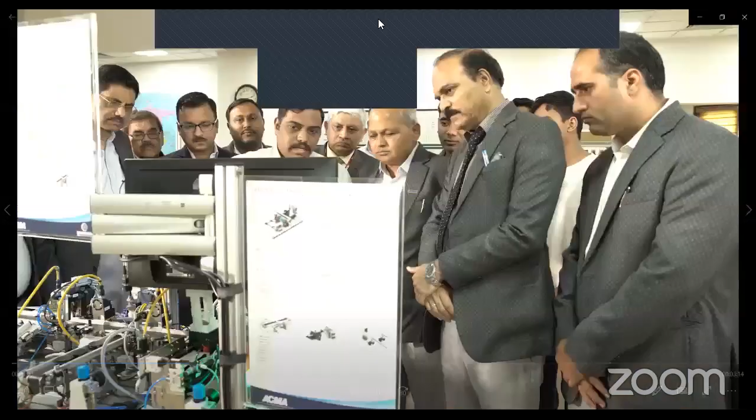To augment the capabilities of the Indian auto component sector in line with changing customer needs and global technological developments, the ACMA Center of Excellence, Saksham, has been conceived to upskill and create talent for the industry. The Center of Excellence focuses on a four-pronged mission: providing a conducive learning environment for enriched experiential learning, supporting the auto component industry for quality first and safety must, facilitating an organizational culture that places organizational goals above individual ones, and enabling design in India for new product design and development.

In order to provide soft skills and technical skills to the industry, we have created this Center for Excellence along with the partnership of our industry academia such as IIT, AOTS and Maruti Center for Excellence.

Setting up of a Center of Excellence has been on ACMA's agenda for the last several years, and I'm glad that this year our dream took a concrete shape. We now have an ACMA Center of Excellence, Saksham, set up in Sonipat. Saksham, as you all know, means empowered, enabled.

The Center for Excellence will lean on subject matter experts and industry experts, and look at bridging the gap that exists between existing capabilities in our industry and what the automotive industry will require as we make leaps in terms of technology, implementing new technologies, new processes, aiming for zero defect quality, and digitizing the entire supply chain.

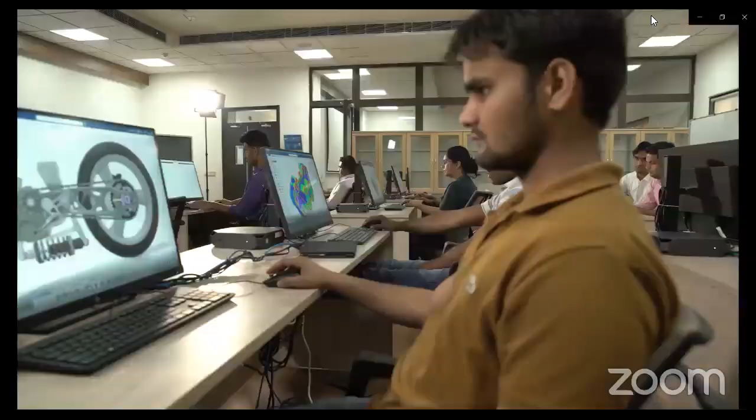Saksham is all about building capabilities for the future. To augment the capabilities of the Indian auto component sector in line with changing customer needs and global technological developments, the ACMA Center of Excellence, Saksham, has been conceived to upskill and create talent for the industry.

The Center of Excellence focuses on a four-pronged mission: providing a conducive learning environment for enriched experiential learning, supporting the auto component industry for quality first and safety must, facilitating an organizational culture that places organizational goals above individual ones, enabling design in India for new product design and development.

In order to provide soft skills and technical skills to the industry, we have created this Center for Excellence along with the partnership of our industry academia such as IIT, AOTS and Maruti Center for Excellence.

Setting up of a Center of Excellence has been on ACMA's agenda for the last several years, and I'm glad that this year our dream took a concrete shape. We now have an ACMA Center of Excellence, Saksham, set up in Sonipat. Saksham, as you all know, means empowered, enabled.

The Center for Excellence will lean on subject matter experts and industry experts, and look at bridging the gap that exists between existing capabilities in our industry and what the automotive industry will require as we make leaps in terms of technology, implementing new technologies, new processes, aiming for zero defect quality, and digitizing the entire supply chain.

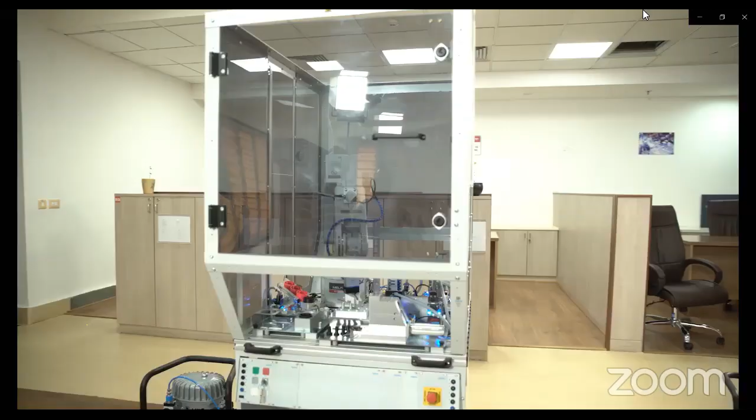The campus creates an academic environment which is more conducive to learning. The automotive industry in India and globally are undergoing rapid technological changes on the front of emissions, safety, and environment. It is imperative for the Indian auto component industry to ensure that our shop floors, as well as our products, are world-class, as also on the cutting edge of technology.

Our long-term vision is to offer use of the shared resources at the center by the industry for co-development of products and creating intellectual property. We request the ACMA membership to encourage their associates, to encourage their management to come forward and train at the ACMA Center of Excellence and be future ready.

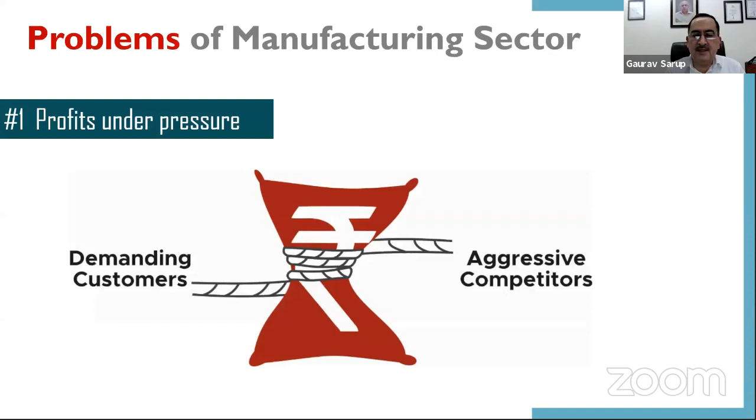The first reason why we need transformation is that profits are under pressure because of demanding customers and aggressive competitors. Second, there is an acute shortage of personnel or workmen, especially machine operators. This shortage was there even before the COVID pandemic, but it has become more aggravated thanks to the pandemic.

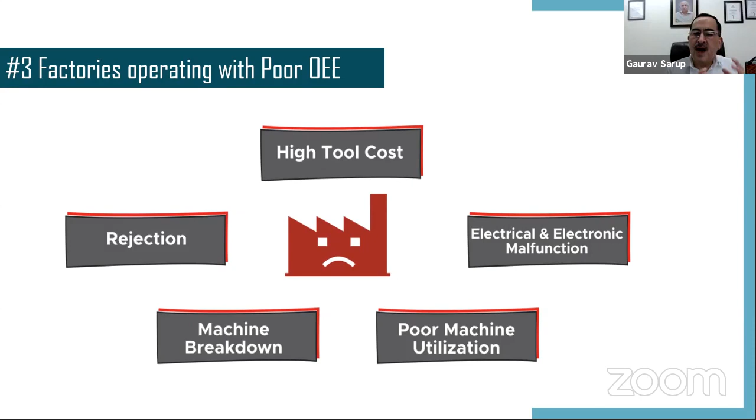Third, in general, most manufacturing units are reporting poor OEE of their plants. OEE stands for overall equipment effectiveness, which is a measure of how well your plant and machinery are functioning. So because of these problems, we need a solution.

And I have given a catchy name to this solution so that it is more easily remembered and people will want to adopt this technology. I have called it IAM, which stands for I am Manufacturing 4.0. So these are actually three terms, I, A, and M, and happily they combine together to form a sentence: I am Manufacturing 4.0.

As I mentioned earlier, manufacturing with optimized processes, with vastly reduced dependence on manpower, and having a system which generates profits, is competitive, and can bear shocks like the COVID shock or tomorrow some other shock - those are the essential components of Manufacturing 4.0. This Manufacturing 4.0 has three essential components, I, A, and M, which I will explain now.

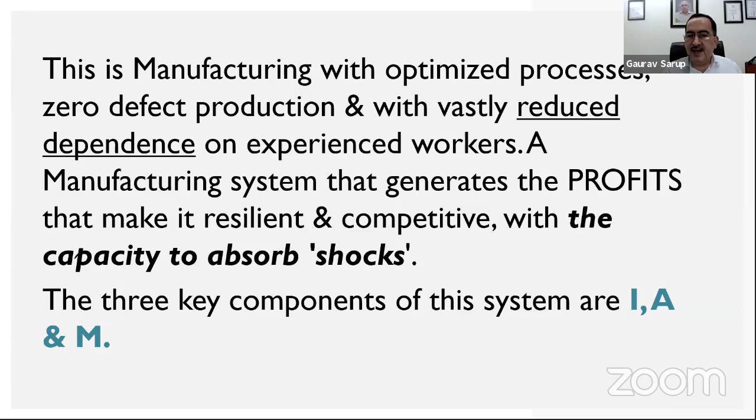I stands for improvement, and this improvement is basically of two types. The first is productivity improvement, and the second is quality improvement. So I stands for improvement. How do you improve the productivity?

If we talk about machining, because a lot of auto component manufacturers are doing machining primarily, the improvement in productivity is because of better machining parameters, which are enabled by technologies such as rigid machines with vibration damping systems, as well as by using technologies like high pressure coolant. In my presentation today, I'm not going to go in depth into all these. I'm just giving you an introduction that these are the areas you need to focus on.

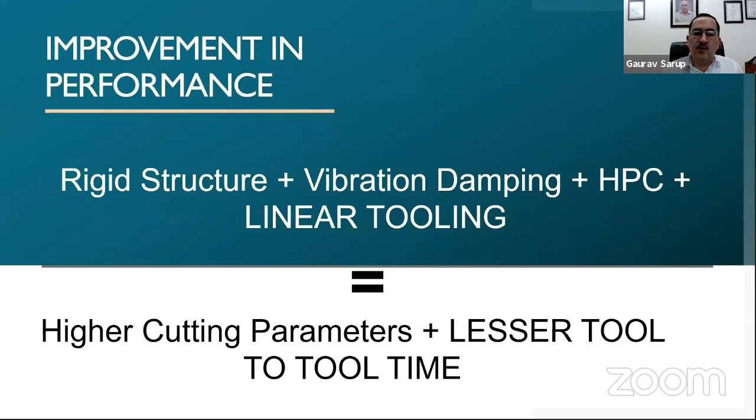So for Manufacturing 4.0, the first thing you need to focus on is improvement, and that is productivity improvement through parameter improvement, through use of technologies like high pressure coolant. The second thing you need to focus on is quality improvement, and for that we have a technology called IoTQ, or Internet of Things for Quality.

It's a use of a number of smart technologies put together in the form of gauging stations and detection systems and smart quarantine systems. All these put together help you approach zero defect production. The first part of this IoTQ, or this method to approach zero defect quality, is a gauging station by the name Smart Correct. This gauging station performs three functions.

It eliminates the need for three kinds of skills of the operator. The first skill, we say measurement skill - that operator needs to be able to measure properly the job that is being produced on his machine.

Second, he needs to be able to use his judgment to see where my process is and what I need to do to stabilize the process, to ensure that my tolerances are maintained and don't go out of the drawing tolerance. And third is inputting that - whatever correction is needed, the operator inputs in the wear offsets.

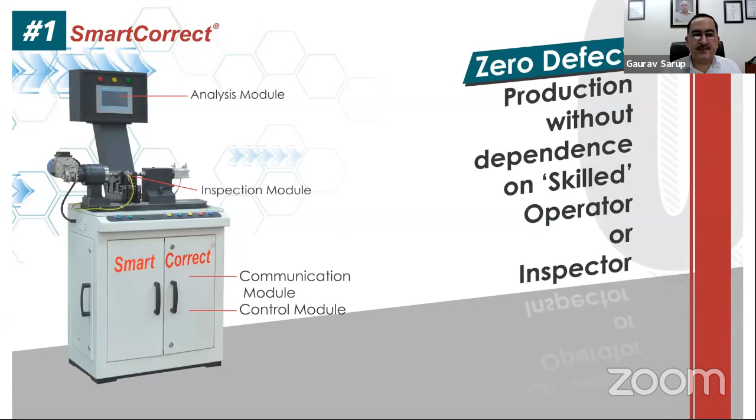Now I want to share something very happy with you, something as an Indian I'm proud of. The world has many technical magazines and journals. One of the most respected in the field of machine shops or manufacturing is called Modern Machine Shop. This is a 95-year-old magazine published in the USA, and it is like a Bible for most machine shops around the world who want to know the latest cutting edge technology in tools, in machines, and in other technologies like metrology.

Now, last year in June, Modern Machine Shop carried an article about smart correct gauging stations, and they described this technology as the cheapest way to achieve data-driven manufacturing.

See, data-driven manufacturing is a very powerful word. It means everything, including Industry 4.0, logistics, ERP, that you are driving your enterprise with the help of data that you are generating from various sources, from the shop floor, from the store, from your customer, etc., from your design office.

So they said that this is a beautiful example of an inexpensive digital device which is fixing your quality, which is ensuring that your quality is of acceptable level without need for any human skill. So this was a big feather in our cap that such a prestigious magazine honored Marshall and our technology, Indian technology, and featured us.

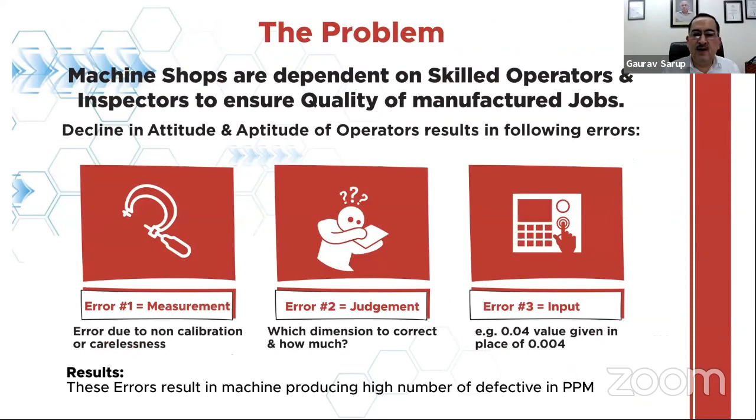I'll just show you a small video about how this works. You may not hear the sound, it is not important. I don't need to give commentary. Please focus on the visuals.

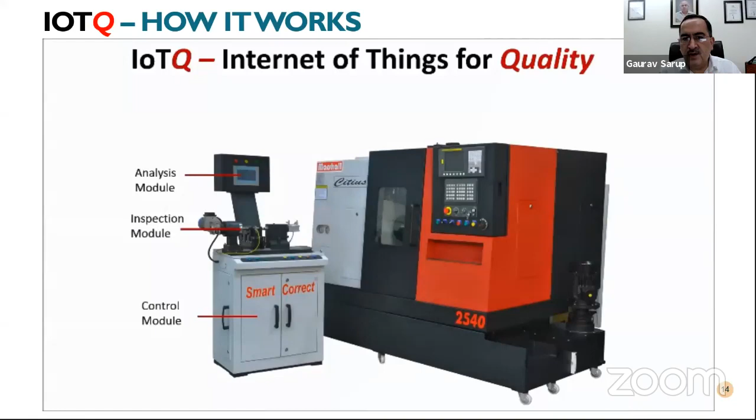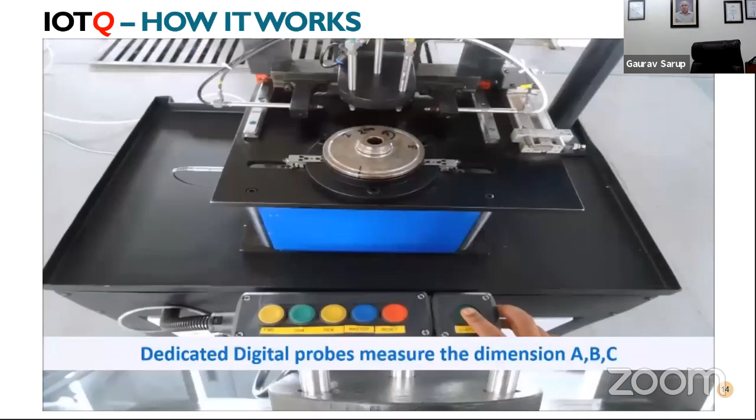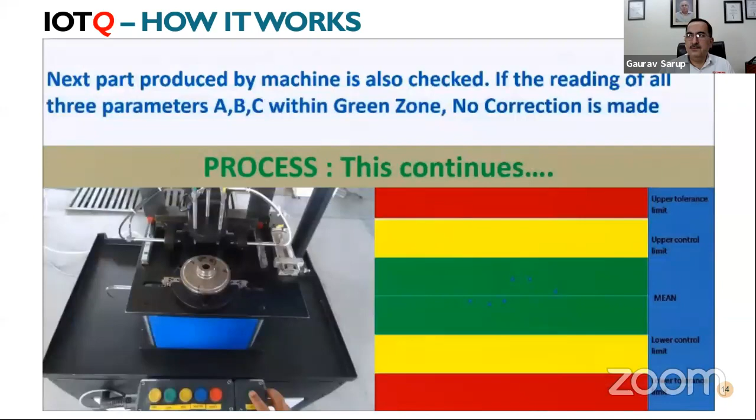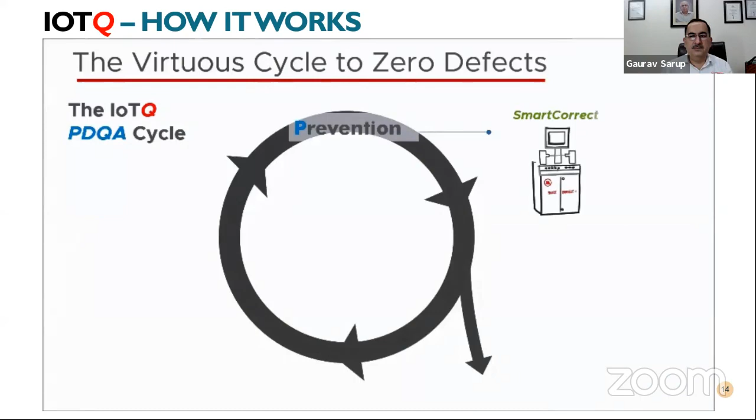Sorry. Sorry. पीछे कर दे, बहुत पीछे. थोड़ा अंदर.

So, I hope you enjoyed the short film. I'll just explain what you just saw in the form of what I call the PDQA cycle.

This is a very important concept and needs to be understood well, because this is the magic mantra for zero defect quality. How is it the magic mantra? See, if you want to produce quality without any defects, the first most important thing is to prevent bad parts from getting made. Prevention. This is the first and foremost thing.

So the smart correct gauging station helps in prevention. And how it helps in prevention, I will take 30 seconds to explain a technical concept. There is something called the tolerance mean. All components where some critical parameters are made, each of those parameters or sizes has a certain tolerance, and that tolerance has a mean.

Similarly, the size which is being produced, the actual size, also falls within a certain distribution pattern, which is called a bell curve, defined by a bell curve. Now, this bell curve also has a mean.

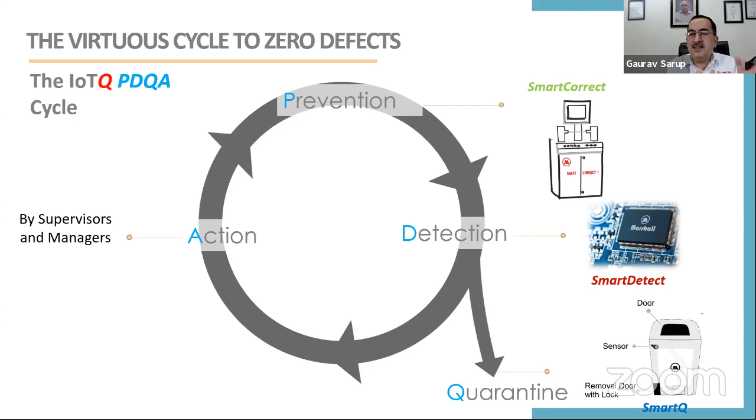So once this happens, this is called a virtuous cycle. Once it keeps repeating itself, gradually you will move from 0.1% defectives to 100 ppm to 10 ppm, eventually approaching zero. This is the methodology, the PDQA cycle. Now we have finished with the I, the first component of manufacturing 4.0, IAM.

The second component, after improvement in productivity and quality, is automation, and that too affordable automation. This PPT was prepared before COVID, and during COVID, all the things that we wrote here are coming true, during and after COVID in these circumstances.

We were saying in February that affordable automation is a must. It's better to automate. And what we were saying has come true more urgently, because COVID has distorted the whole system in such a manner that either you don't get operators, or you have things like social distancing, so much distance between people, and all that. So you are in a mess.

So what is the solution? The solution is to have affordable automation. Not only will it solve your problem of Ram Prasad—that's a general name I've given to an operator—Ram Prasad ka problem bhi solve hoga, but also you will be improving your efficiency and reliability.

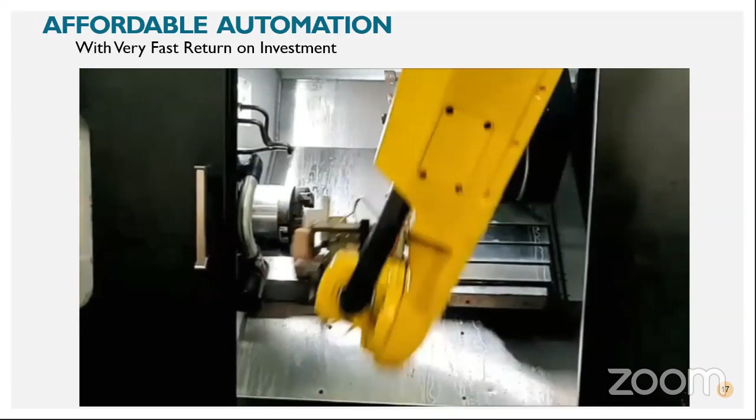So friends, this was a short video about affordable automation. And these are some examples of this type of affordable automation without robots for different types of jobs. So some examples are given, typical examples of automotive components.

Similarly, you have this affordable automation with robots. And here's a point which I would like to emphasize, that affordable automation is a term which needs to be deeply understood. What do you mean by affordable? I like this term better than another term generally used in the industry, which is called low-cost automation.

I don't believe in low-cost automation, because if it is something where you have invested lightly, sometimes it can be a jugaad. And we all know jugaads may work at times, but they are generally unreliable. And here, if we want to be world-class manufacturers, we cannot have jugaad.

So I prefer the term affordable automation, because affordable here means return on investment. Anything which gives return on investment within 2 years, in my view, is affordable. What you saw previously, these types of machines without robots, typically have a return on investment within 1 year, 12 months. And these types of cells with robots also have ROI within 2 years.

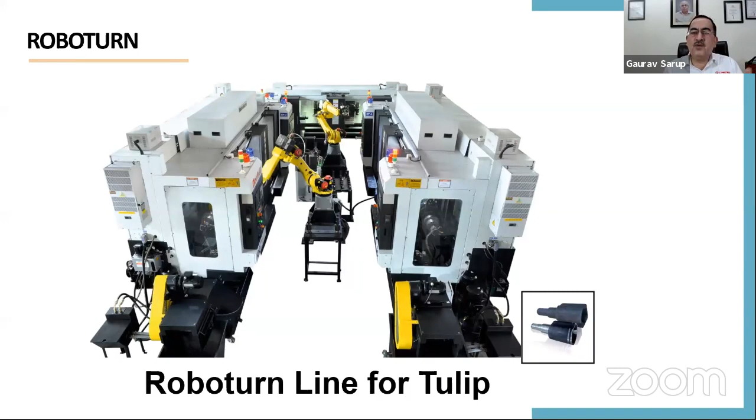It's also doing the measurement with the auto gauging. And the other robot picks it up and is taking care of 2 spindles, because the cycle time over there is shorter for operation 20, the second operation. So in total, 6 spindles are being controlled by 2 robots. This is what makes the ROI quick, which is why I call it an example of affordable automation.

So this was the second part of manufacturing 4.0. The first, I repeat, is improvement in productivity and quality through auto gauging and the complete technology called IoTQ, Internet of Things for Quality. Then we came to automation, rather affordable automation—I explained that affordable means ROI within 1 year in many cases, and definitely within 2 years for all cases. So that was the A part. The last part of manufacturing 4.0 is called M. M stands for machine monitoring.

One of the biggest problems of any initiative taken for improvement on the shop floor is that you need human intervention to know how well it is working. You need supervisors or inspectors to go and ask the operators, what did we get, what's the efficiency, how many hours did it run, how many pieces came out.

All that spoils the whole idea of having an improvement system, because you are dependent on humans. First, you get bad, diluted data, because if things are not good on the shop floor, people have an incentive not to reveal or to mask that information. Second, that data is not available in real time. Third, once the data comes to somebody, he has to fill it into spreadsheets, make graphs, and by the time all that is ready, that thing is over. Two days later, who cares? It loses its relevance.

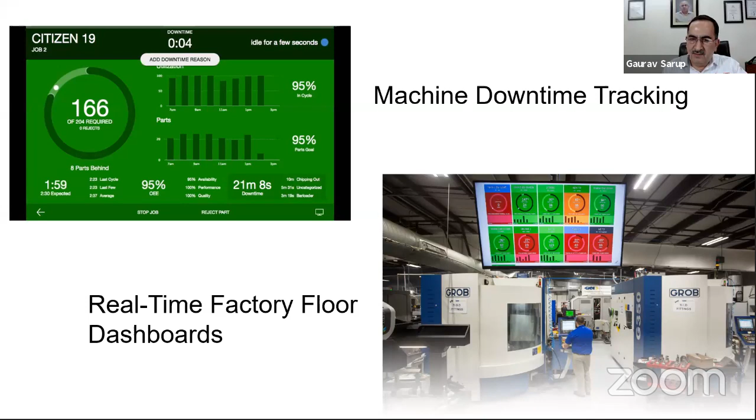What is the present OEE utilization? What is going on? All that stuff. You can put a big screen on each line on each shop floor so that all the people know which machines are performing well.

As you can see here, the ones shown in green are exceeding their expected production. The one in orange is on the borderline. The one in red is below, performing poorly. So all this live data also motivates the operators or supervisors to quickly intervene and improve.

You can also have alerts and notifications. You can set limits, for example, that when the shift ends, if the machine stops producing 15 minutes or earlier before the end of the shift, an alert should go to the supervisor. And many other such things.

For tool change time, if you have set 10 minutes, you can set an alert that if more than 15 minutes is being used, an alert should go. Or for job changeover, if you have given a time of 1 hour for changing from job A to job B, and if that is exceeded, again an alert can go.

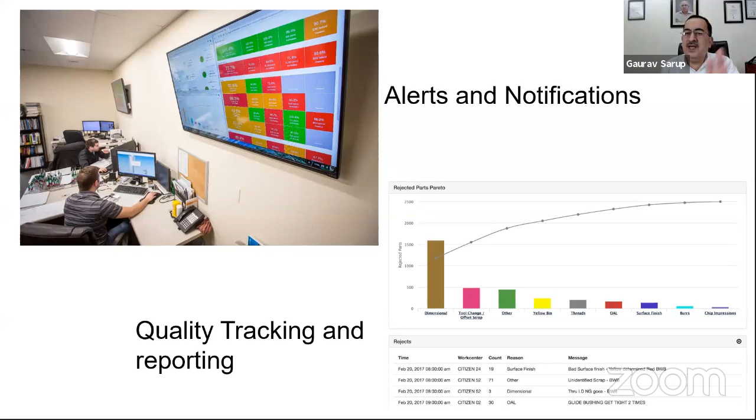And then you also have Pareto analysis, like the one you see on the right hand corner of the screen. Pareto analysis means the system generates a report where things causing the problem are listed top down by order of impact. So the biggest cause comes first, then the second, and so on, so you know where to focus. These are some examples of the alerts and reports you get.

So now I come to the end of my presentation, and I have taken my time very exactly. I'll request for at least 2 more minutes, because it's precisely 3:30.

So how is IAM unique? How is this term IAM unique? It is unique because whatever solutions you have seen or heard of before are isolated solutions, something to take care of productivity, some device to so-called take care of quality, something else to monitor improvement in parameters, which is improvement in performance. Here, what we've done is combine everything into one.

Because what is the use if you do partial improvement of something while some other reason is causing you great pain? For example, what is the advantage of having improvement in cutting parameters with a better machine, with high pressure coolant, if your quality is very bad?

You're producing 2% rejection, and 0.1% of those rejections is not getting caught by the huge number of inspectors that you have put, and it's going to the customer, and you are having those debit notes and unhappy customer. What is the use?

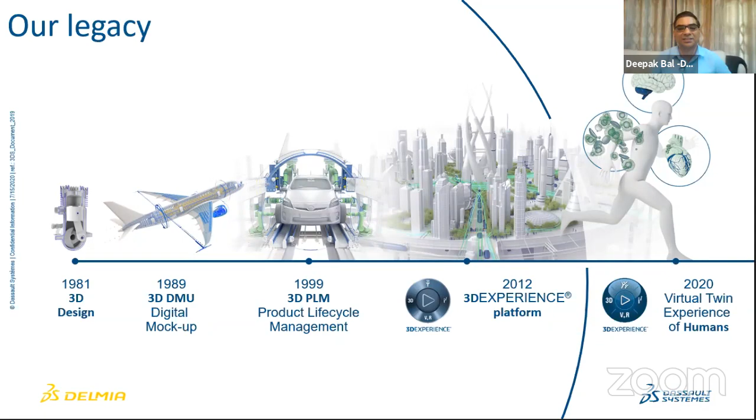And all the tools and technologies are sort of provided on the basis of this compass. So whether it's 3D, whether it's virtual plus reality, intelligence, etc. You might be aware of the more common known tools, and ACMA has a setup which is running most of our tools, whether it's CATIA, SolidWorks. But today we will be talking about digital manufacturing, which is the Delmia portfolio.

With all these brand applications, we are serving almost all of the industries. So all of the 11 industries that we cater to, whether it's auto, aerospace and defense, marine, life sciences, industrial equipment, etc. We cover all the industries, and we have been serving them for the last 40 years.

Now coming to the topic of interest today, I would like to cover this topic with three major points. I will start off with what are the challenges we face in the manufacturing industry, the three critical elements for success for any manufacturing industry.

When I talk about manufacturing, it could be automotive, industrial, high-tech electronics, etc. Manufacturing is common across anything that is produced, whether it's a laptop, a mouse, or a car, etc.

So I will just take a pause here because I wanted to reflect back on what Gaurav ji was mentioning about data for quality, digital devices, and a closed loop mechanism, machine monitoring. These are very critical aspects, and in my presentation I will be touching on these aspects, how our software technology covers all of them.

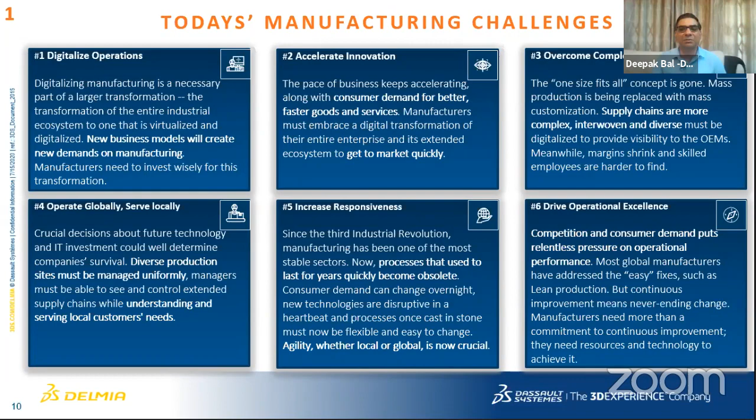So these are the six major challenges any manufacturing organization faces. Now what do we see with this? If I want to break down the operational challenges, there's pressure on meeting quality standards and regulations, like BS6 norms. There are a lot of government regulations that keep coming into force, and every organization needs to adapt, including adapting to technology, which keeps changing. You need to be agile, or invest in technology that keeps upgrading with time. A simple example: you use a smartphone with Android OS, and after maybe 4 to 6 months, there's an update or upgrade provided. So is the technology you're using keeping itself updated to the latest and future trends? That's important. With increased usage of technologies, new types of raw materials, and inflation, how do you maintain your costs?

Customers today are moving towards mass customization, not mass production. Every customer has a unique requirement, so this is another challenge. You find that in a lot of automotive products, there are many variants customers are provided with, to cater to their liking for mass customization.

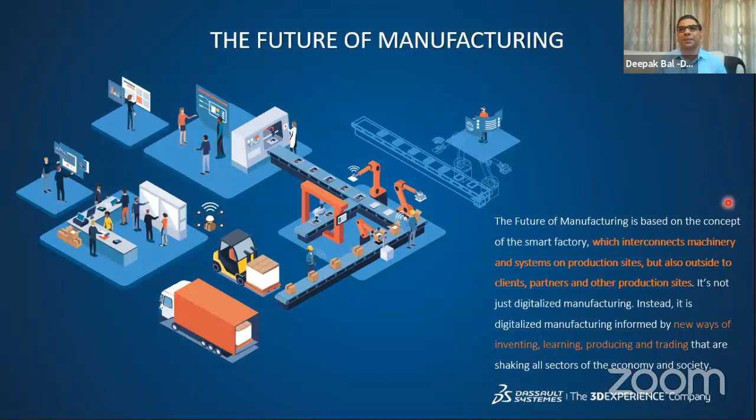The important words I want to highlight again are: interconnected machinery, systems, partners, production sites, and clients. So you see, not only the systems and the sites, but manpower is getting connected to enable innovation for the future.

Now, with the next slides, I will get into details of the technology that we have. Our technology is based on our compass. The circle that you see on screen is known as the Dassault Systèmes compass, and most of our technologies are based on this philosophy. The 3D experience platform is basically the virtual experience platform approach to manufacturing excellence, and it provides a global operation management cockpit that captures knowledge and decision making support for operational excellence.

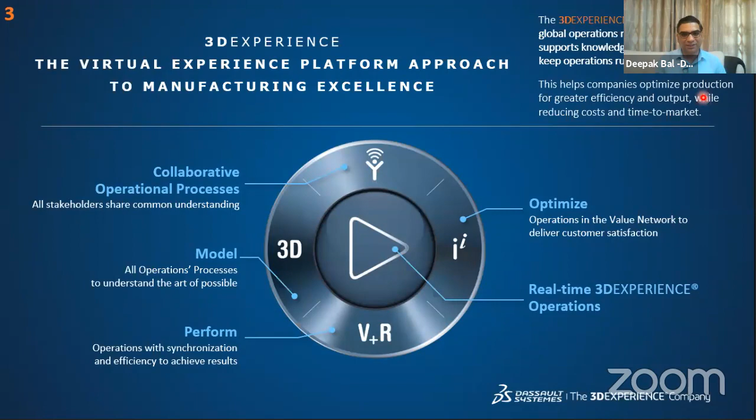I will give you a glimpse of what I mean by this 3D experience platform and how it connects together. When I say a cockpit, it is basically a dashboard which monitors the entire processes happening on a factory, gives you real-time feedback, and connects the virtual and the real world. I'll explain those in my next slides.

So just to take this explanation further,

Hello. Hello. Hello Deepak ji. I think he lost the connection, so just wait for a minute so that let him rejoin. Deepak, have you spoken to the faculty? Yes, just now I spoke with him, so he's going to connect again. Okay, no problem. Hello, I hope you can hear me. Deepak ji, can I share my screen now? Yeah Deepak, you can please. Okay, I'm sorry, my network got a bit disturbed, so I will just, I hope. It is a technical issue, everyone faces it. Okay, I hope you can see my screen? Yeah Deepak, okay, I'm sorry for this.

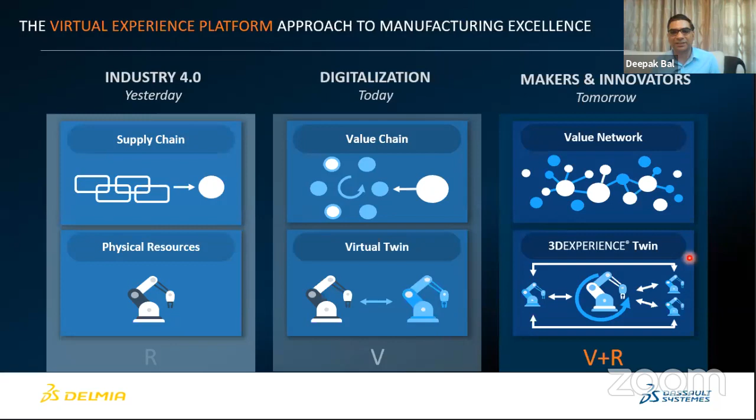So I'm on my next screen. Now let's understand what a virtual experience platform for Factory of the Future is. If there are any questions, I'm open. Maybe I can take a minute or two to know if there are any questions, or I will just move ahead and present to you the Factory of the Future concept.

Now let's understand what the Factory of the Future is, how it works, how it comes into picture. We have categorized the Factory of the Future into 4 major layers or buckets: process engineering, manufacturing engineering, value network engineering, and operations. All these are in a digital environment, and they constitute the entire operations of any manufacturing organization. Let me start with one by one on them.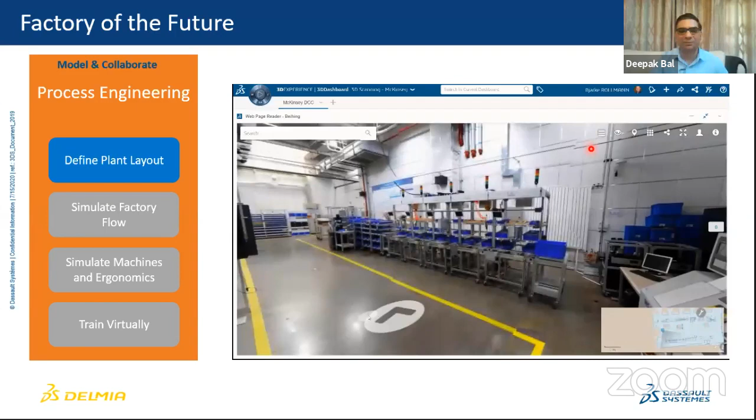I have a few videos here which will explain this concept. I hope the videos are clear. Maybe due to the network, the videos might be a bit slow, but I will still try to explain this concept. What we saw on screen was a digital representation of a factory, of an existing factory.

Like I was discussing earlier, every 1 year or 1.5 years, or maybe earlier, there is a change in product, and your customer could be asking for a new product or a new production line because of the new product that is going to be released in the market. So how do you ensure a quick response, or bring those changes into your factory?

What you see on screen is an actual video of our software running, where the entire factory has been modeled, and the changes can be done in a digital world. Even before you incorporate those changes in real life, you can digitally analyze those changes, see whether they fit into your existing factory. Are there any further equipment, tools, or accessories that you may need to provide to ensure that the new production line is set up? All that you can do in a digital or virtual environment.

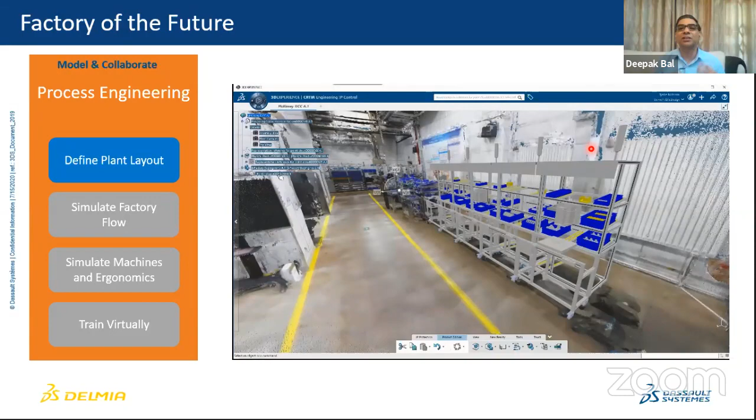Once that is done, on my next screen, you can see we are simulating the entire factory in a virtual world. You can see people moving, you can see AGVs, automated guided vehicles, moving around the factory premises. You also see information being tabled up, which is nothing but data. Whenever operation is happening in a factory, the system analyzes the efficiency of the manpower or the equipment, and on a real-time basis provides this information to you, so that as an organization you are aware whether this is the right factory layout, or if there are other things you need to change to increase efficiency. In this example, you see people moving around, picking things from a conveyor system, placing it at another station, etc. You also see machines and guided vehicles moving around.

Depending upon whatever is the requirement, this simulation can be done in a virtual world, and you can analyze whether this is the right layout for the new production line.

Now moving to ergonomics. This is a very important aspect, because many times if I have designed my workstation in such a way that the worker fatigues earlier, his productivity will decrease. So the system is smart enough to analyze whether the ergonomics of the workstation are right, whether this is the right height of the workstation. And if it is not, it will give you that information, that maybe you need to reduce the height so the worker can work efficiently with lesser or no fatigue, and his productivity increases.

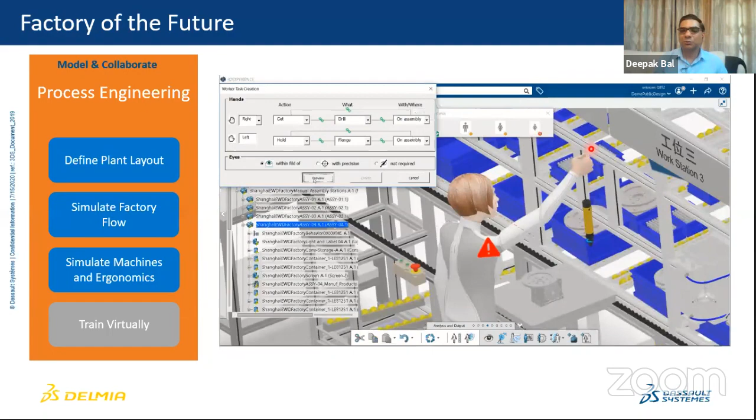When you have a new production line, you need to train your people. Training could be for two aspects, because there is a change in the production line and a change in the setup of the workstation, so you need to train people. What you see on your screen is a virtual training environment where the entire process of assembly is being created in a virtual scenario, and the operator can easily practice, learn, and start his operations. This is also important because nowadays we see a lot of temporary or contractual manpower being used in an organization, so it is important to quickly train them on the new product.

Or if you have manpower turnover, you have new people coming in month on month. So instead of having a supervisor spend his time training these people, you can have a virtual environment which will train the manpower, and they can quickly get onto the production line or the assembly line to start their work.

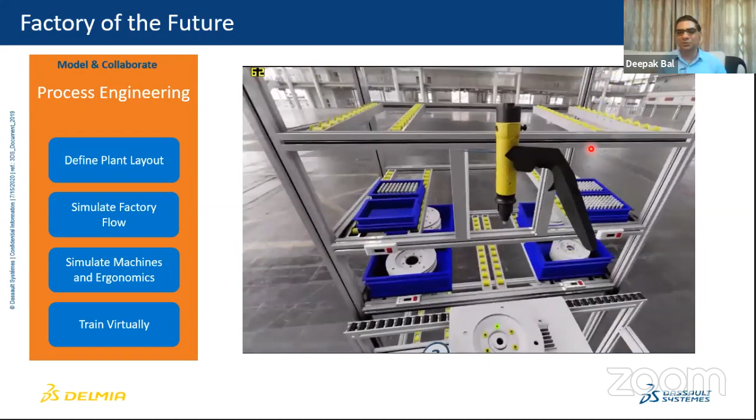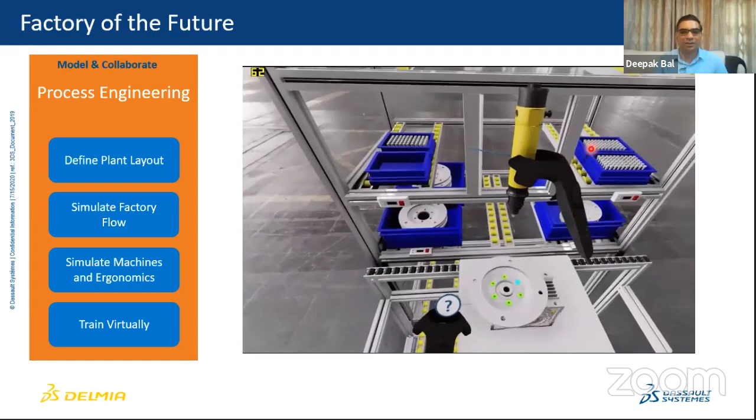So process engineering, to quickly summarize, covers the virtual environment, whether it's a production line, a plant layout, whether it's a human person that we want to simulate, whether it's the machines, etc.

Now coming to manufacturing engineering. Manufacturing engineering basically covers three main aspects: your product definition, how the product is going to be manufactured, that is your process plan, and the work instructions for that, how that assembly is actually going to happen.

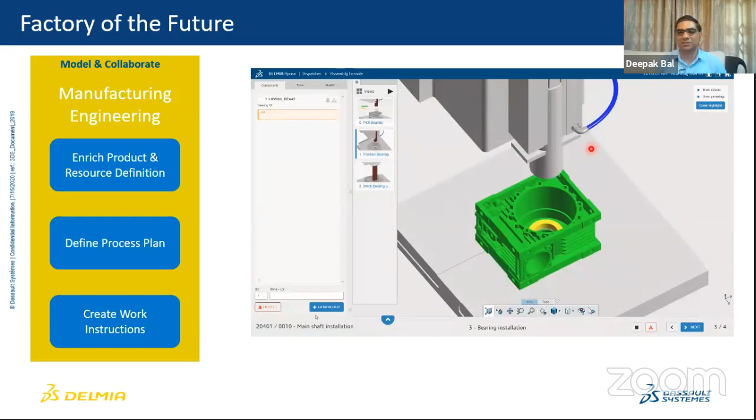If you need to do some fool proofing, you digitally simulate it and accordingly you are able to fool proof it. So all these things become a part of your work instruction. This work instruction, you make a video file and a PDF file which you can circulate across teams. So even before they actually get into the production shop, this information is with them and they can start to do their work accordingly.

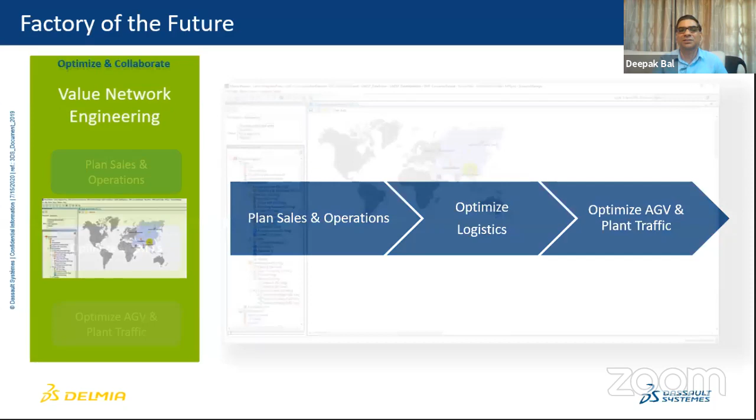Now moving to the third layer, which is value network engineering. So when we talk about value network, it is basically you are planning your sales operation, planning logistics, planning plant traffic. Now from a manufacturing organization, operation planning is very important because when to order raw material, or if some new equipment is needed, by when it should arrive, if additional manpower is needed, how to organize that. So all this forms a part of your sales plans and operation.

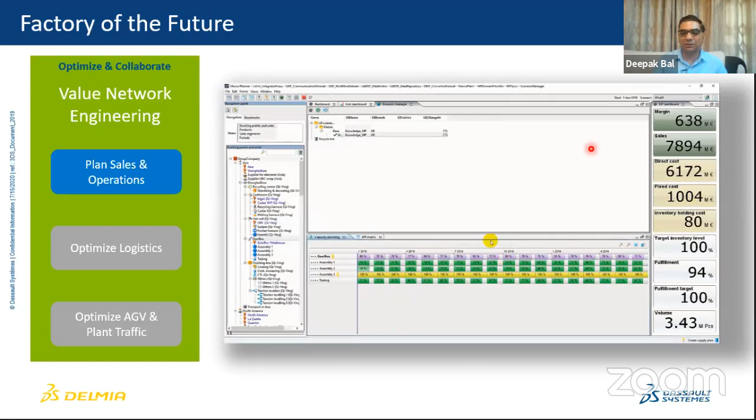This is one aspect of planning, sales planning and operation. Then we come to the second aspect, which is logistics. Now, whenever you make some product, you need to transport it to the customer. Now depending upon, you may have a rate contract with the transporter, that if we send this quantity with this transporter it will charge this much, if we send with someone else it will charge this much, if we send by air it will cost this much. So you can simulate all that because all this information, rate contracts, freight cost, air fares, etc etc, is known to you.

You can put it in the system, simulate that to transport this in the given time, what is the best available option. So the figures you see at the top, which are changing dynamically in real time depending upon what location for a particular product you have selected for transportation, it will give you those values. So this is all again data that is being used in a very intelligent way to give you information.

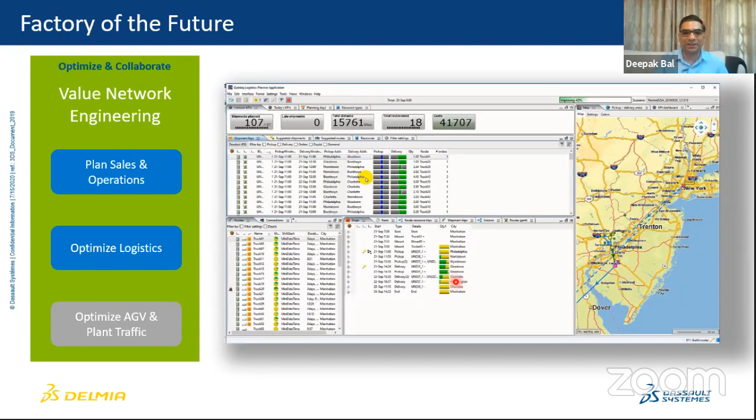The last is organizing your traffic inside your plant. Inside the plant, a lot of equipment is moving. So they could be automated guided vehicles. They could be conveyor systems. There could be forklifts, etc etc. And you want to optimize so that I'm using my plant in the most efficient way. So that is a way of increasing the plant efficiency and productivity.

Lastly is the operations management part, which covers daily scheduling, manufacturing operations, IIoT, Industry 4.0, manufacturing analytics and lean management. Let me take a minute to explain what we have on screen here.

If we recall, Gaurav ji was talking about machine monitoring, so we will come to that aspect of how machines can be monitored. What you see on this video is monitoring the production efficiency of machines, the scheduling of machines, and which machines are running at 100% capacity. Those are all in green.

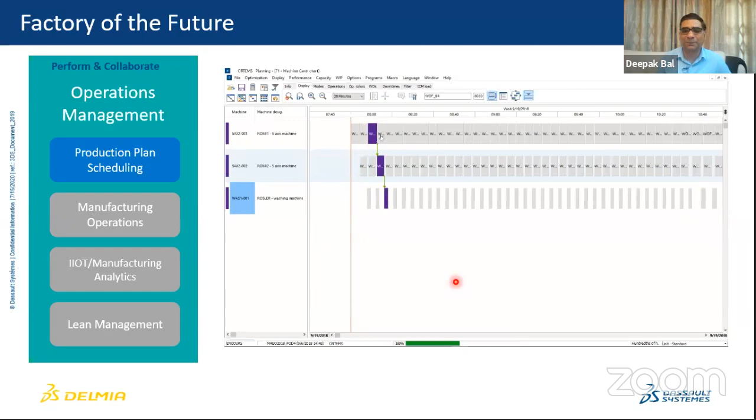So like I was saying, what you're seeing on screen is the analysis of all the machines on the shop floor, how they are working, what is the efficiency, what parts they are producing, etc. So when we go to manufacturing operations, this is a dashboard which is typically available on any modern shop floor.

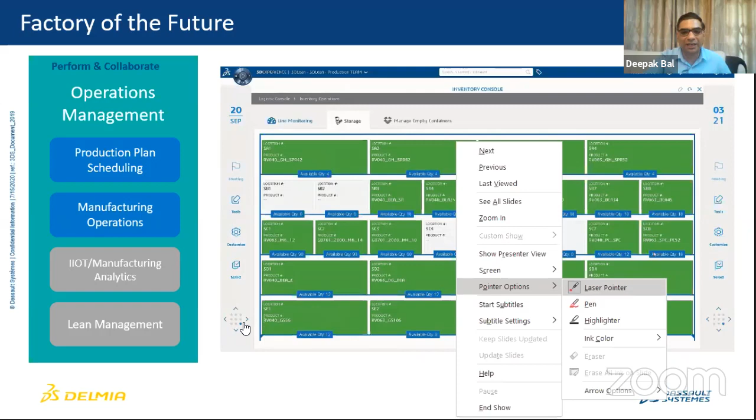What the dashboard is showing is, at the assembly line, what operations are being conducted. So at assembly station 1, what are the operations? Are there sufficient raw materials to carry out those operations? Is there any delay in operation? What you see on the left is the various assembly stations, and we are capturing all that information and providing it in the form of a dashboard.

Now this dashboard, since the system is digital in nature, can be made available on a desktop system or on a tablet, and a person sitting hundreds of kilometers away across the internet can have a look at what is the efficiency or what is the production process happening at the plant level.

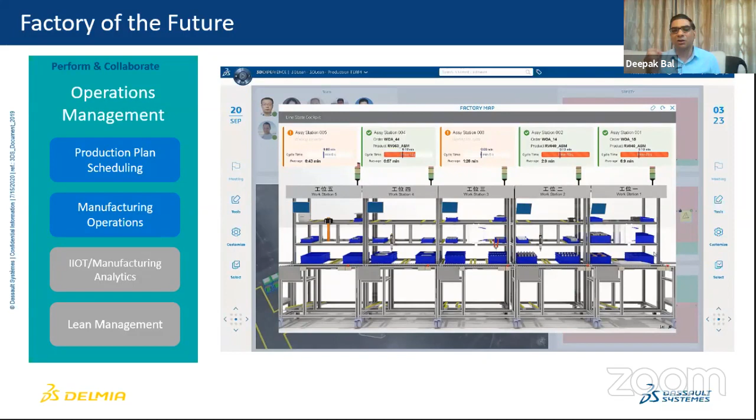When I say information, it could be information from a handheld scanner, or from any machine connected through a PLC system. So any information can be easily captured from the assembly line.

This screen basically shows the performance of the assembly line. Has there been any delay? What is the takt time? Are we achieving the takt time, or are there any issues, etc., so that you can do a root cause analysis and see what were the reasons for that.

Now coming to the next aspect, which basically talks about manufacturing analytics. So this is capturing the performance of the machines. We heard about OEE, so this is basically capturing the overall equipment effectiveness. What was the time the machine was available? Was there any downtime? What could be the reason for the downtime? Due to the downtime, how much productivity was lost, etc.

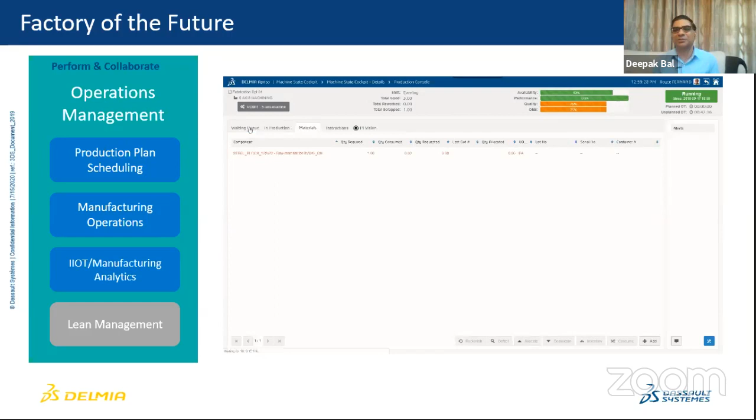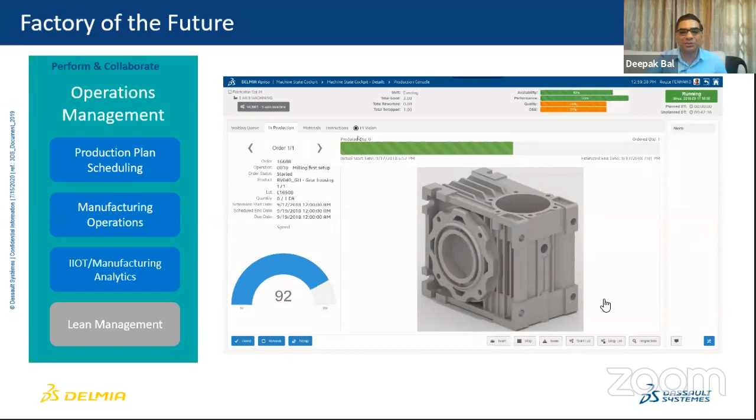So this is all real-time information. It is not that someone is going and inputting this information; it is being captured as the machine works. As the machine continues to work, there are sensors on it which can be used to capture real-time information. You have a whole portfolio of sensors - there could be energy sensors, motion sensors, etc., to capture whatever information, because efficiency of equipment also depends upon many other parameters, and that can be easily captured through these sensors.

Lastly, when we talk about lean management, this is very important for organizations, because they need to ensure that all the operations they are taking care of should be planned in a very efficient, or lean, way, so that there is no duplicacy of work or productivity loss.

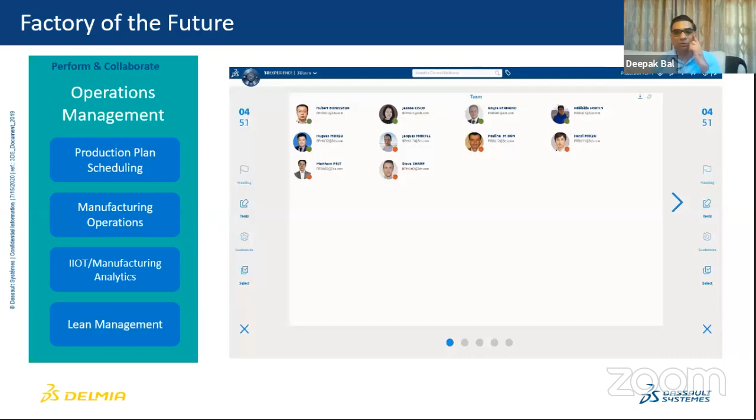So when we talk about lean management, what you can also do is digital collaboration. What you see on screen is assigning tasks to a supervisor, having a quick meeting. This quick meeting could be in the form of a whiteboard, where you can write a note and send it to the supervisor, and that information is available to him on his tablet, so he can take decisions accordingly.

Vice versa, if there is an issue at the shop floor and the supervisor wants to report to his management, especially in the current scenario with social distancing, he can quickly pull out his tab, write that message, and that information gets captured not only into the system, but to his senior management, and the decision can be taken effectively. The supervisor or senior management might be in another plant location, but that information comes to him on a click of a button, and he can send instructions back to the production line operator. So this shows how the system works, how you can assign your work order to different people in your team.

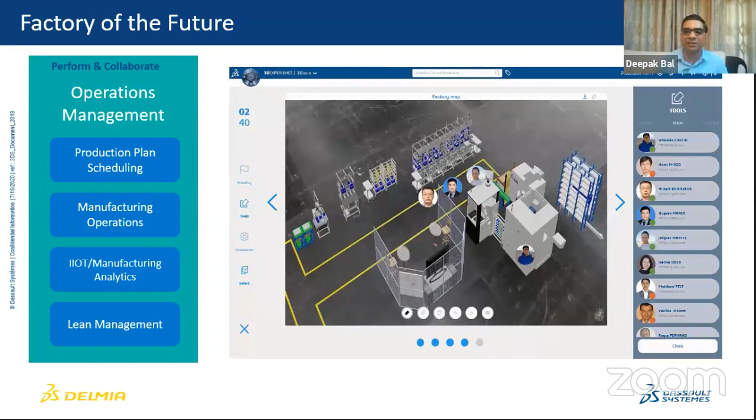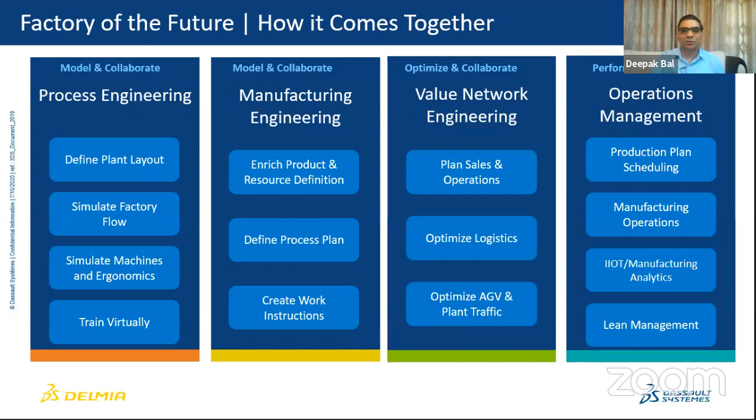With this, I've tried to present the four main key pillars of a truly digital manufacturing entity, which we call the factory of the future. I hope I was able to provide a good explanation of all these four pillars. To summarize, the factory of the future is basically the virtual world extending and improving the real world.

We model whatever needs to be done in a virtual world, and that information is carried or provided to the real world environment. The real world environment performs those operations, and the feedback from the real world is then brought back into the virtual environment to improve it further. So what does this mean? Suppose today I'm doing an operation in the real world, and there is some feedback - how can I improve the operations week on week, month on month? It's about continuous improvement in my processes, so there has to be continuous feedback between the virtual and the real world.

Capturing knowledge and know-how is very important, because without such a system, the knowledge and know-how is left with the operator, line supervisor, or managers managing the shop floor. As they move from one role to another, or leave the organization, all this information and knowledge is gone with them. So it's important that best practices are captured and reused every day.

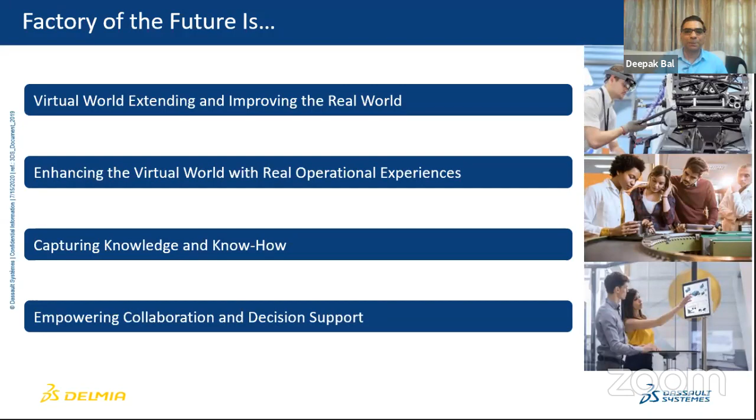Empowering collaboration and decision support is important because you have all the real-time data available, making it easy to take quick decisions. Since data is available from all operations in the factory, you can collaborate and take decisions accordingly. So what we've seen is the 3DEXPERIENCE platform, or factory of the future, which helps address the four key elements of success to achieve a digital experience that not only improves your productivity and competitiveness, but also enables the merger of both the virtual and real worlds to provide continuous improvements and experiences to users.

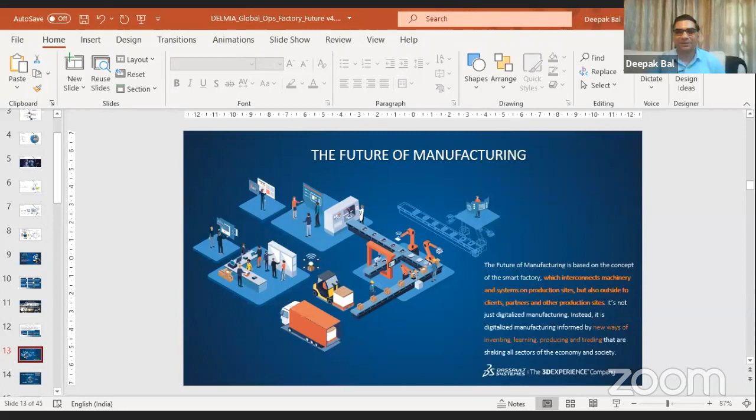Okay, thank you. Deepak, there are some comments in the chat box also. Please explain about 3D twin again, 3D twin experience. Okay, I will open the chat box and have a look. I see one question which says, please explain about 3D twin or 3D twin experience.

When we say 3D twin, it's basically like the word says, twin. It is like creating a replica of the real world. So a simple definition, if I have to give, is creating a replica of the real world. In the real world, you have two or three main components: your machines, your manpower, and your equipment. So I'm creating a virtual environment which will capture the manpower. You would have seen in the videos that I played that there was a virtual human being moving across the plant layout, and then you capture the machines or the equipment. So I'm creating a virtual twin of the real world. That is what it is meant. I hope I have answered your question.

Then I see one question from Sanjay which says, can this system be implemented in any factory? Yes, this system can be implemented in any factory, whether it's a modern factory or an old factory, because there are ways to seek information from the equipment. There are now a lot of sensors which are easily available. So it's basically capturing information from those equipments, putting it into the system, creating a virtual environment, and sending the feedback to the real world.

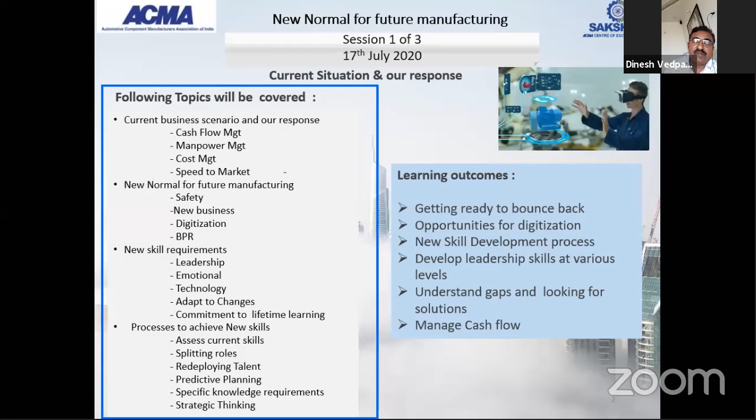Day two, I'll be covering the most important topic called changing the mindset. I drive the zero defect cluster programs, and I'll be teaching you the basic difference between problem solving and problem killing, how to develop that skill, what is the silent brainstorming session, and what are the breakthrough projects in quality, breakdown, inventory, and customer satisfaction. And finally, important is how to build the zero defect culture. I also drive another topic called inventory-less production, or you can say air-to-air manufacturing.

And the last session will be, next slide please. This will be the last session, that is how to make decision making skills reach the bottom line, starting with leadership, associates, and support functions. And most important is that unless we empower the people, so what is the process of empowerment? And you have heard the Japanese 7 types of wastes. These are very well defined, but I have my personal DVPs 25 wastes.